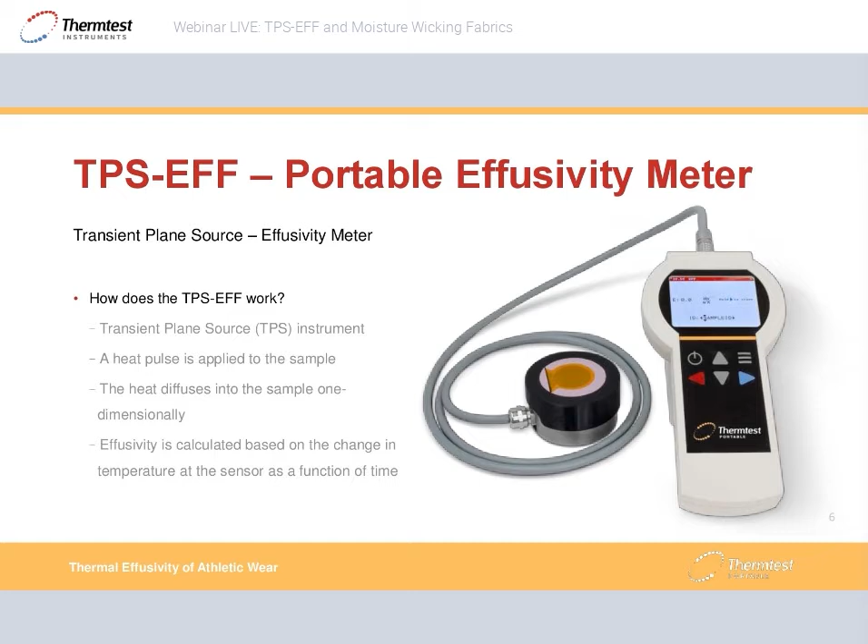So how does this meter work? Well, this is a transient plane source instrument. And like any transient method, it involves a heat pulse. So from the meter, a current is applied to the sensor. The sensor then heats up, and this heat diffuses one-dimensionally into the sample from the sensor. There's a temperature increase experienced by the sensor during this time, and the temperature increase over time is used to calculate thermal effusivity.

There are multiple different ways to measure a sample. Typically, with small samples, you measure with the sensor facing upwards. Now, if your sample is too large to do this, or for any other reason, you can measure with the sensor face down.

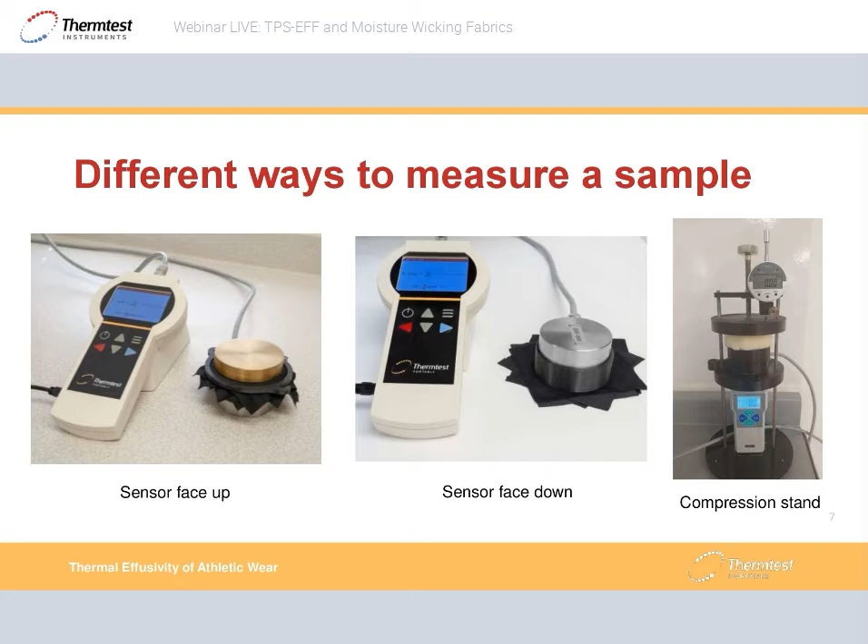If you want to vary compression in your sample, for example, in the figure on the right, the TPS-EFF sensor is mounted in a compression stand with a piece of compressible foam on top. This allows you to vary compression over time or pressure. You can also vary temperature and other parameters over time if you wish.

Viewing data on the TPS-EFF is very easy. The meter features an onboard display that allows you to view your measurements without using a computer. However, if you wish to use a computer, you can.

The TPS-EFF comes with a data utility, and this can convert the data into a CSV file format that is compatible with Excel. So if you look on the left here, here's a heat graph of a measurement, so a temperature rise over time. And using the data utility software, the same heat graph can be seen in Excel.

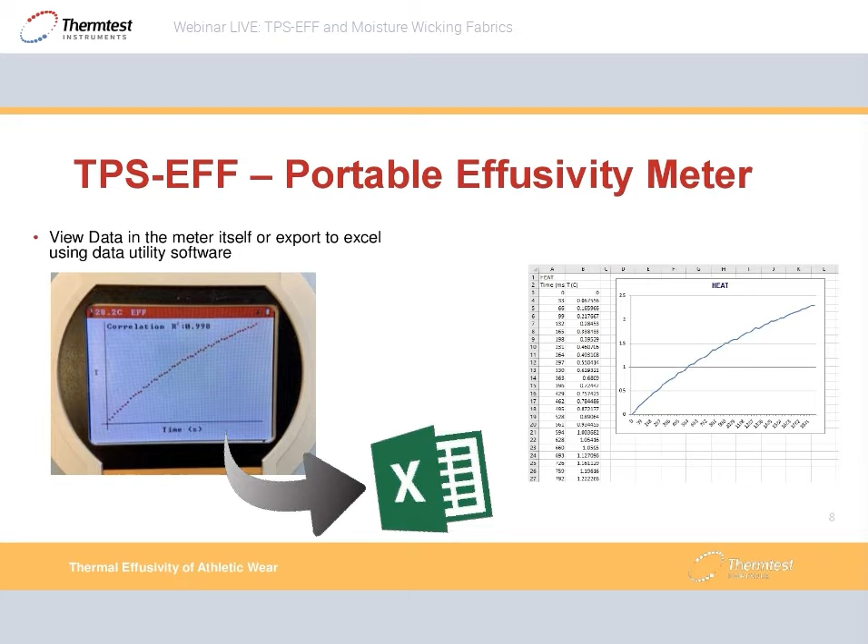So what exactly are we measuring? What is thermal effusivity and what is thermal effusance? Most simply put, thermal effusivity is a number that you can attribute to a material that will indicate to you how warm or cold it feels to the touch.

This allows you to compare different materials that are similar, and you can tailor your material to feel attractive to a buyer. Types of materials like this include flooring, automotive interiors, bedding, mattresses, clothing, coats, shoes, and so on. We will later on see how we measure a form of active wear developed by Acticool. Essentially, anything you can touch or that you come in contact with has a thermal effusivity value.

So what is the difference between thermal effusivity and thermal effusance? Well, the prime difference involves the modes of heat transfer. In thermal effusivity, similar to thermal conductivity, the only mode of heat transfer involved is conduction. Conversely, thermal effusance involves not only conduction, but also convection and radiation.

Thermal effusivity is commonly interchanged with thermal effusance, but we figured it would be very important to make that distinction now. So especially in textiles and fabrics, the proper term is often thermal effusance. However, most people just say thermal effusivity.

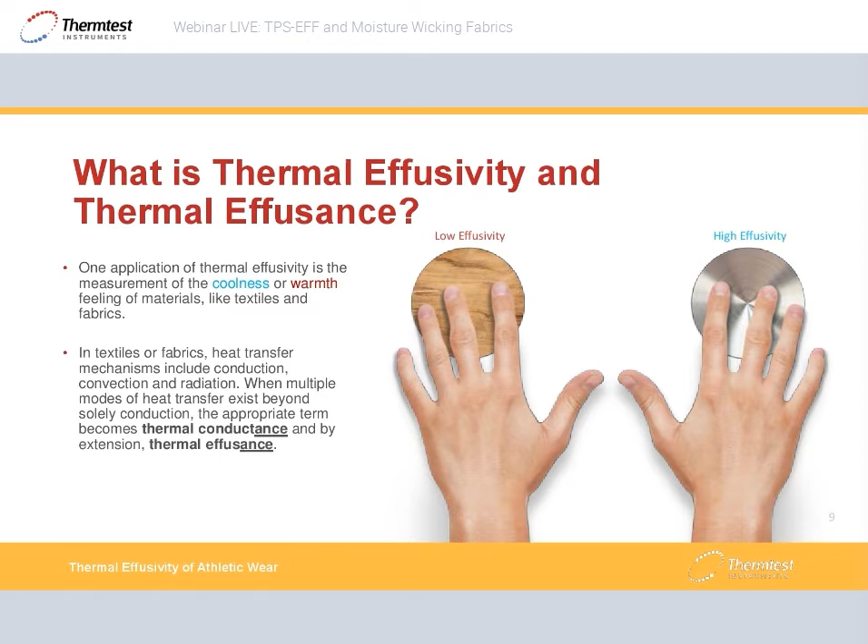So a bit more about thermal effusivity. It is not a standalone quantity, but rather an expression of other quantities. If you look at the equation here, thermal effusivity is equal to the square root of the product of the thermal conductivity, the density, and the heat capacity of the material.

If we look at the graph closer to the middle of the screen, it features the temperature rise over time of a material with low thermal effusivity in red and high effusivity in blue. So the low effusivity material that is fairly insulating experiences a quicker temperature rise over time. The slope is steeper than its counterpart, which has a high thermal effusivity.

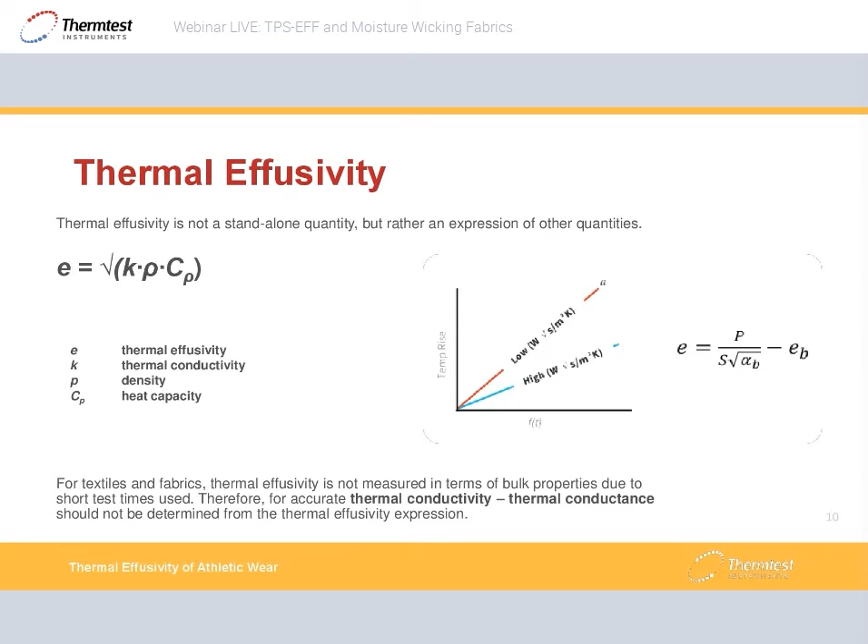So how can we ensure this? What is the evidence that the heat is truly propagating one-dimensionally? We can verify this with an anisotropic sample. If we start with isotropic, that means the material has the same properties no matter which direction you measure it in. And anisotropic means that that is not the case.

So with this standard material with known properties, NIST 1450D, this is a fibrous glass board. It is known that heat propagates slowly through the thickness of this material and quickly radially. So if we perform a measurement on this material and the heat propagation is not one-dimensional, we will see that very easily, as any amount of heat loss in 3D will be exaggerated due to the properties of this material.

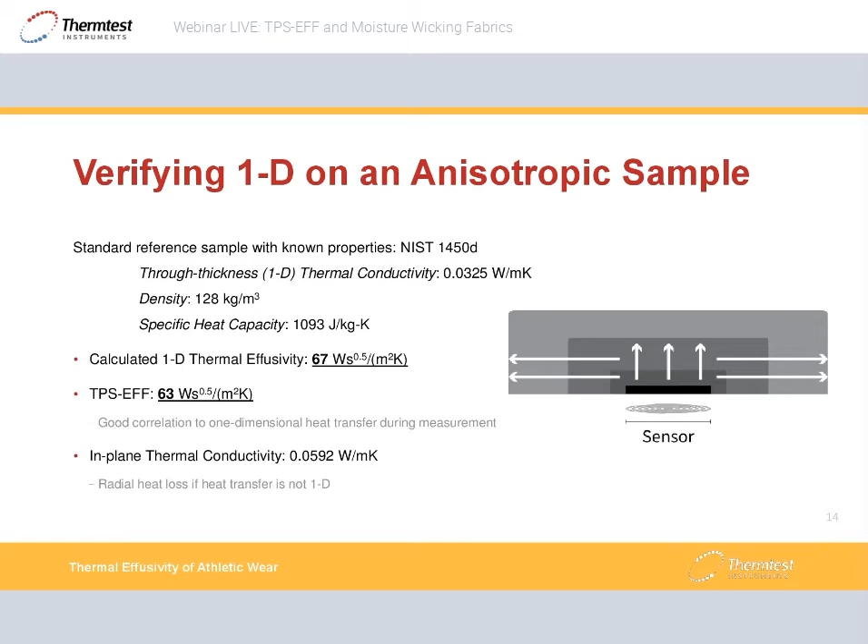You will also notice that the TPS-EFF features two different test times of 2 and 10 seconds. Why is this? This allows a simulation of a 2-second touch and a 10-second touch, where the longer test time allows the heat wave to penetrate further into the material. What is the advantage of that?

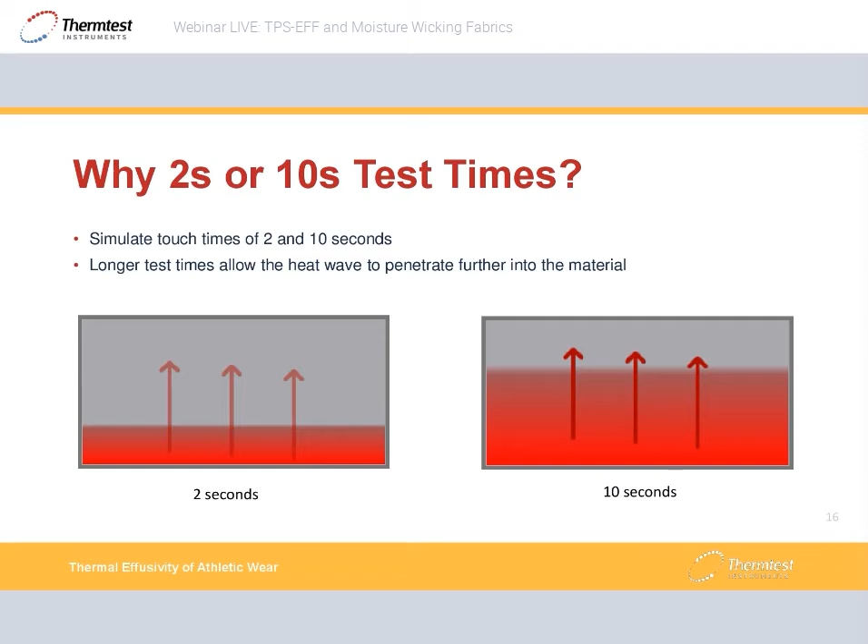Well, for layered or non-homogeneous materials, the effusivity value that you obtain is going to vary depending on the touch time. Some examples of this would be a tablecloth over a table, a fitted sheet on a mattress, a phase change material. For a short touch time, you're mainly getting a value indicative of the surface of the material, whereas using a longer touch time, you get a value that is more indicative of some of the deeper layers of this material.

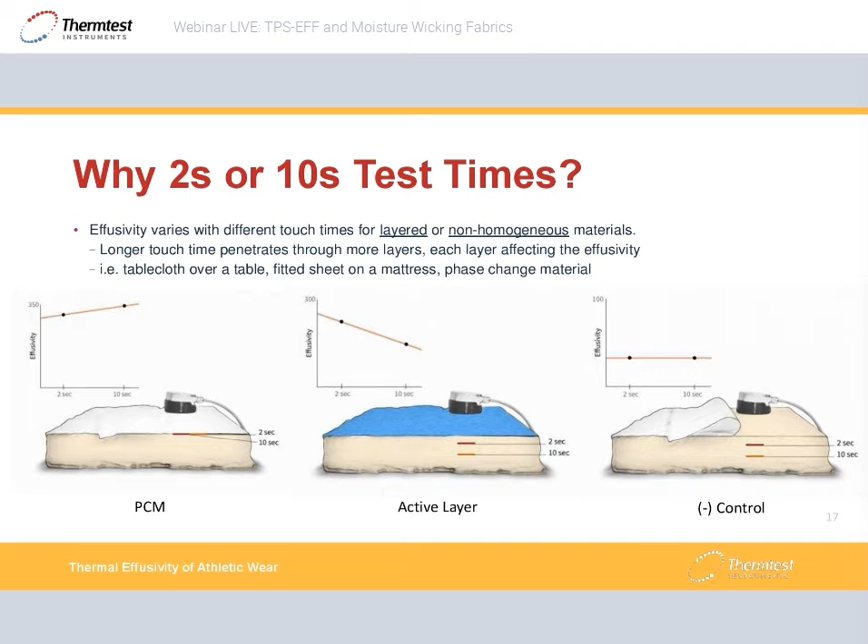If you look at the middle figure, there's a layer of active material over top of the mattress. The active layer is designed to feel cold, and for a 2-second touch time that is mainly measuring the surface layer, it yields a value indicating that it does feel cold. However, for a longer touch time, for 10 seconds, we obtain a lower effusivity value indicating that the heat wave is penetrating further into the mattress.

The TPS-EFF was designed to comply with a standard developed by the American Society of Testing and Materials. This is an internationally recognized institution that is depended on to ensure accurate and repeatable measurements.

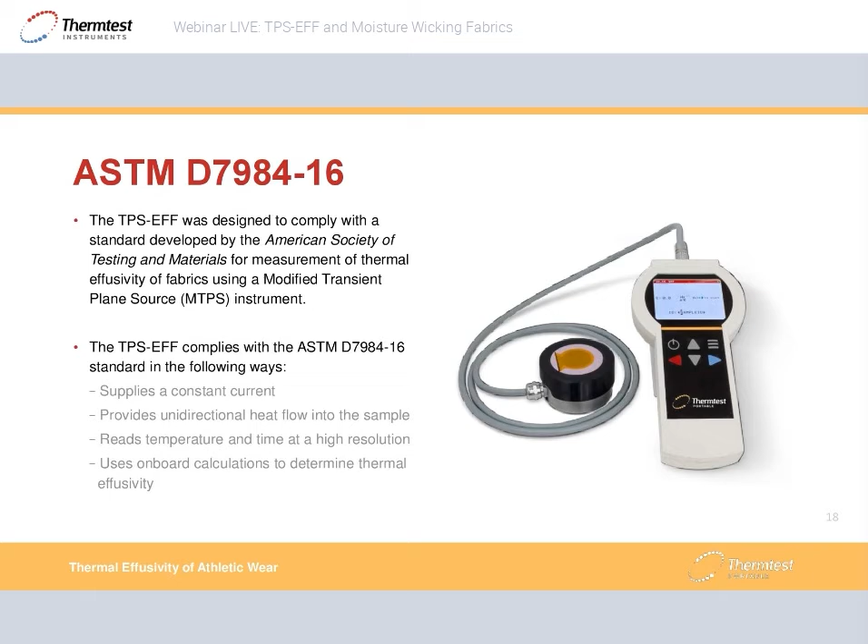Without further ado, Ben is going to tell us about Acticool, a company that produces activewear fabric with exceptional cooling properties. Take it away, Ben. Thank you to everyone for taking the time to join us.

Acticool was initially developed as a base layer for use under body armor. The issue we initially set out to resolve was the moisture and humidity trapped against the user's skin, which causes rashes and discomfort. We did so by developing a multi-layered hydrophilic yarn, which pulls the humidity away from the skin on contact, and then disperses it across the fabric, slowly bringing it to the surface. In doing so, it creates a cooling effect, substantially dropping the wearer's surface temperature.

In layman's terms, this means that as soon as you put on an Acticool shirt, it starts pulling away your sweat. Instead of drying super fast, the fabric moves the moisture around rather than leaving it in one spot. This helps get rid of the bubble of humidity between you and the shirt and stops that wet blanket feeling.

In the last few years, the dangers of heat stress have become of greater concern. When we're exposed to heat, our bodies begin to thermoregulate. It tries to bring our core temperature back to equilibrium by increasing both the blood flow to the skin and sweat production. The issue is that as we perform physical labor, our bodies direct blood flow towards the muscles as they require increased levels of oxygen to stop the buildup of lactic acid. The resulting decrease in blood flow to the skin will ultimately lead to the body storing more heat, and that raises your internal temperature.

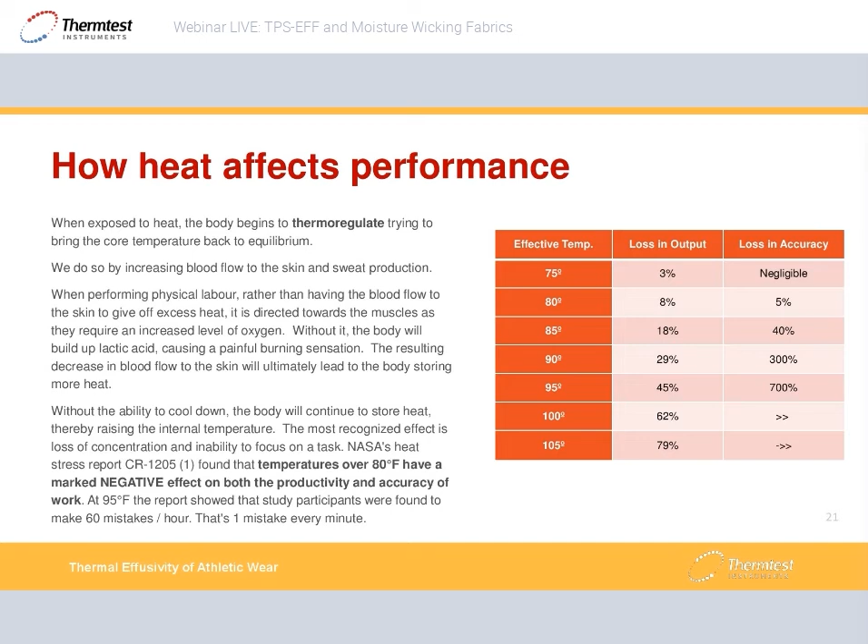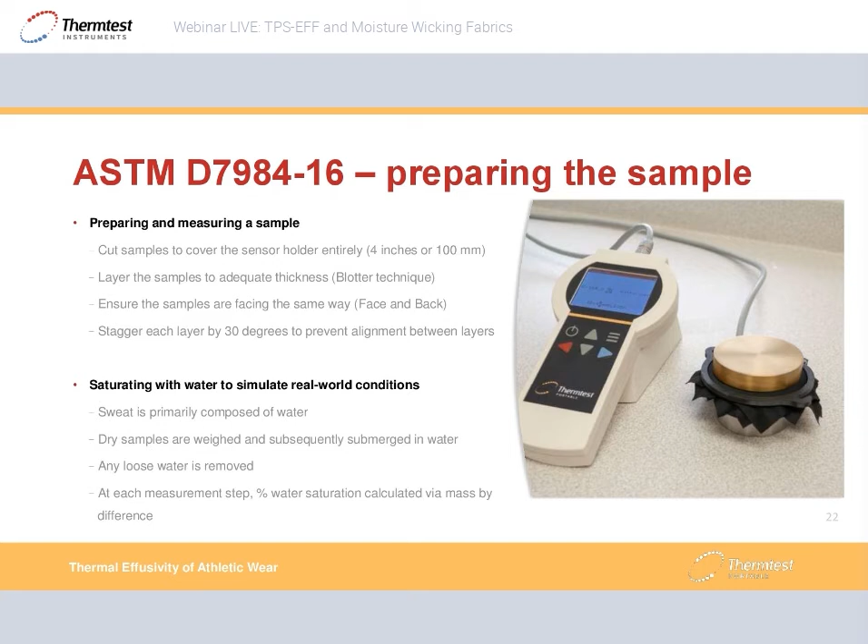So presented with this fabric that has cooling properties and is often encountering situations where moisture is involved, we wanted to set up the samples in accordance with the standard for testing textiles and fabrics, and to simulate sweat. Even though the composition of sweat varies from person to person, sweat is still primarily composed of water. So we chose water to simulate the moisture conditions. Here's a quick demonstration of sample setup, and it takes us all the way to sample measurement.

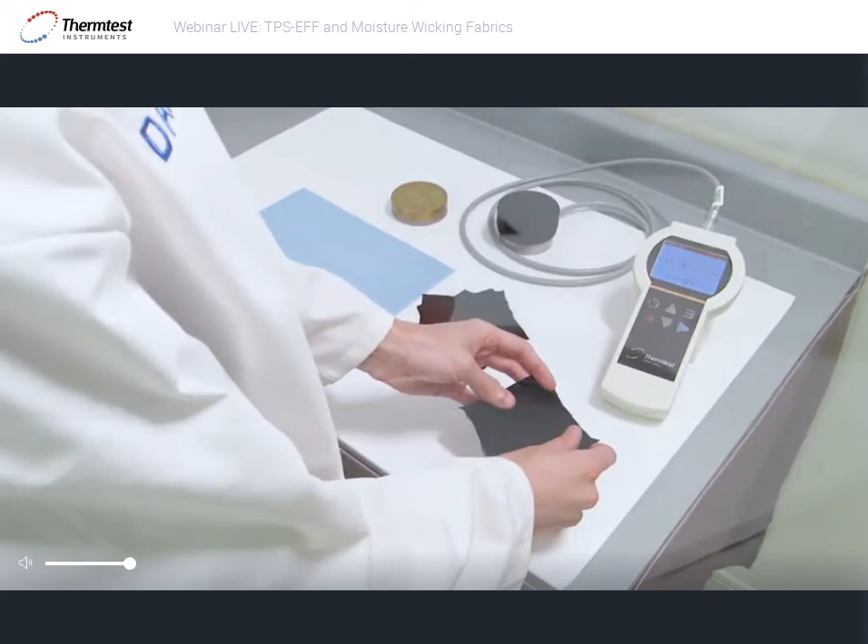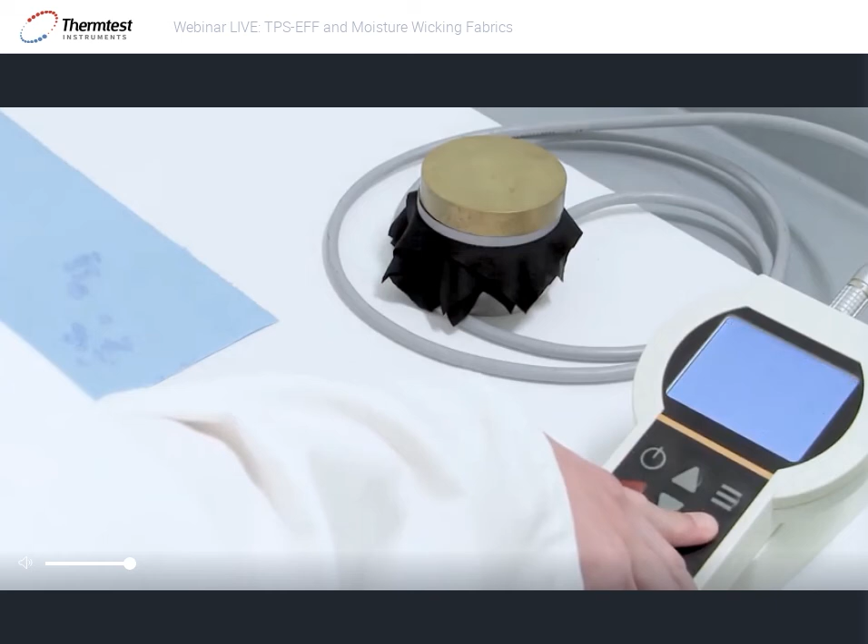So first we take a layer of Acticool fabric, and we moisten it. We then remove any loose water, and then we stack this fabric, staggering it between the other layers of fabric to prevent alignment between layers and ensure better repeatability of measurements. We then apply the stack of fabric, which is one sample, to the sensor, and a layer of Lexan to ensure there are no wrinkles in the sample. That is to ensure better repeatability of the measurements.

And then we apply a mass to the sample to ensure good contact between the fabric and the sensor. And then after waiting a period of time for the sample and the sensor to reach isothermal conditions, we can perform our measurement.

What we observed during this testing for these fabrics was that at a higher percent water saturation, the value of effusivity for the fabric was also higher. This means that as you get hotter and sweatier under these conditions, the fabric gives you an increased cooling effect proportionately to the amount of strain the user is undergoing.

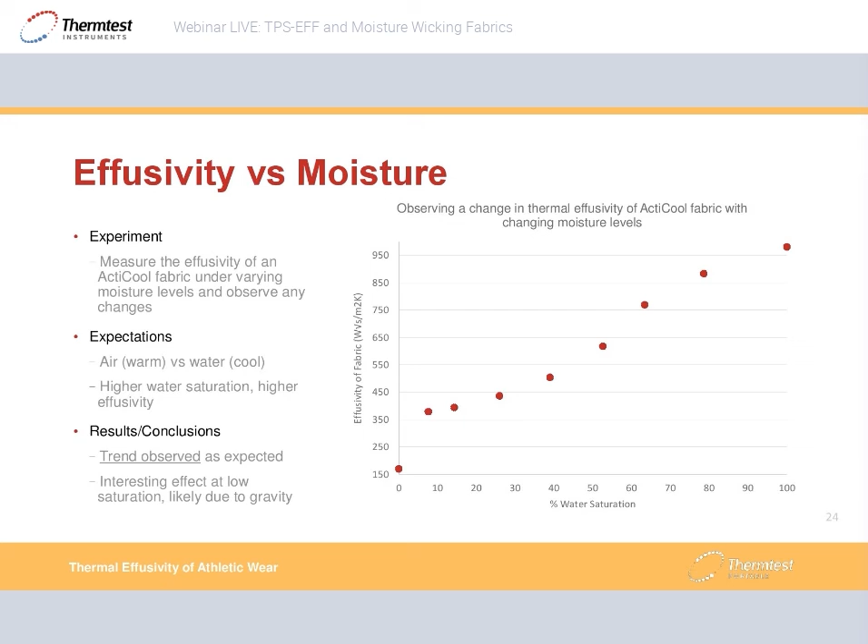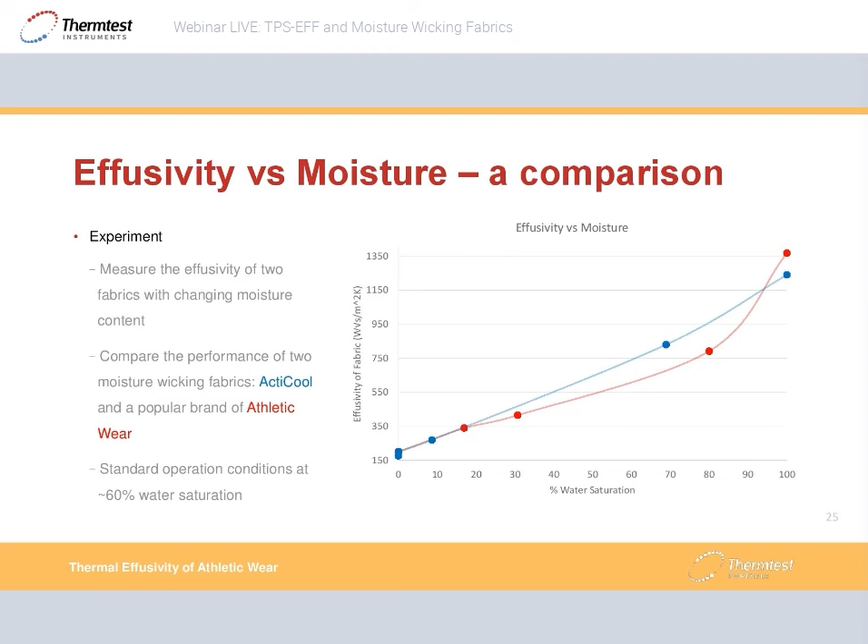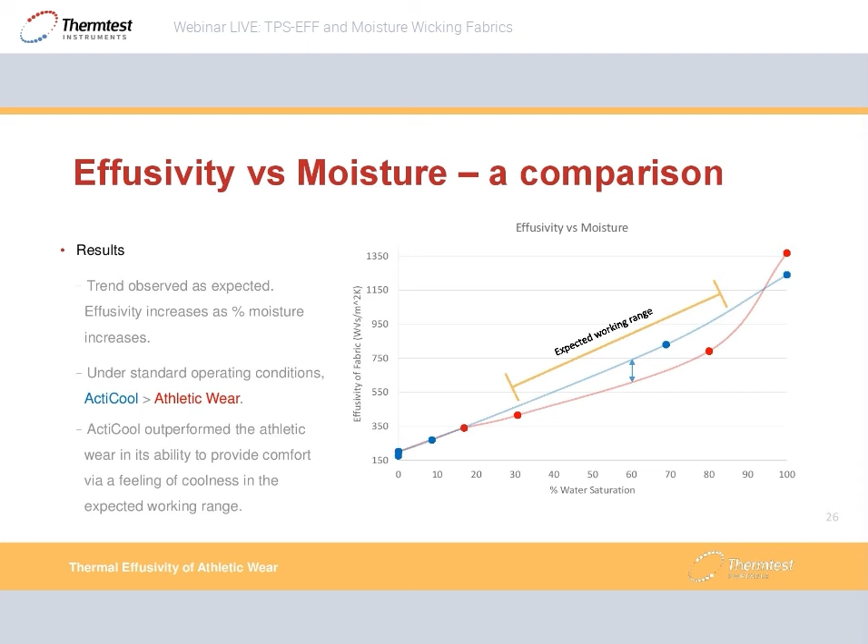After observing this trend, we thought it would be interesting to compare how this trend in the Acticool fabric compares to a popular brand of athletic wear, keeping in mind that standard operating conditions are typically at around 60% water saturation. What we found was that in the expected working range, Acticool outperformed the athletic wear in its ability to provide a sense of coolness and comfort under situations of strain and discomfort.